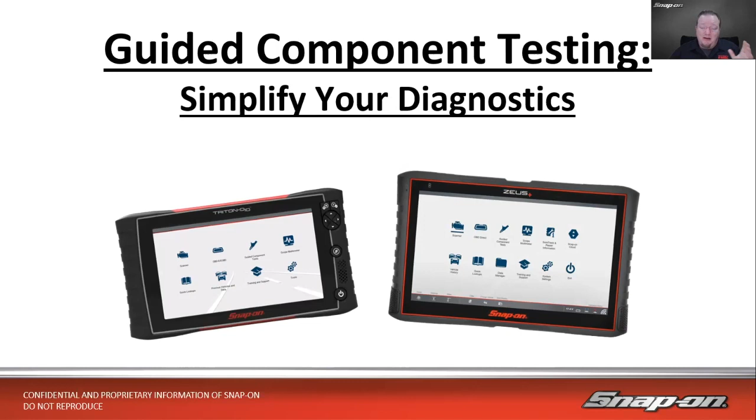So our topic today is guided component testing. Simplify your diagnostics. Now, if you've used guided component tests, you may be aware of what I'm talking about. But if you have not used guided component testing and you have a tool that's capable of it, you'll see, hopefully by the end of this, that this will save you a ton of time when it comes to testing stuff. Because really, we have two different types of diagnostic tools, right?

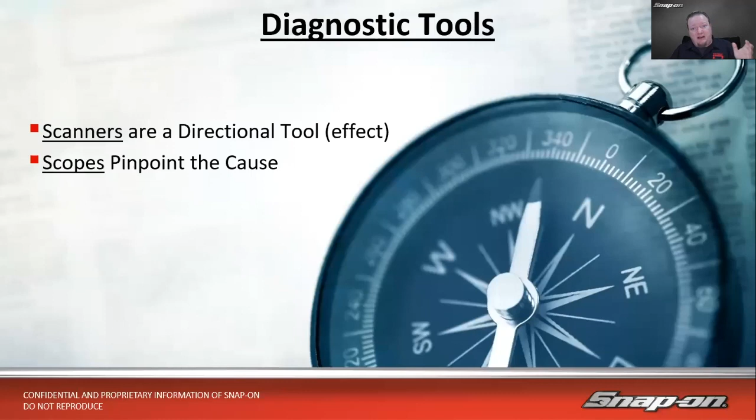We have scanners and we have scopes. And when I think of a scanner, I like to think of it as a really nice compass. It's going to point us in the right direction. It's going to show us where we need to look, where we need to go, but it's only showing us the effect after it already happened. In order to find the cause of the problem, because every effect needs a cause and every cause has an effect, so that's where the scope comes in. I'm going to actually test the component or test the wiring, test something in order to tell where the actual problem lies and not just look at the symptom.

So if we think about a vehicle's computer, let's think of it like a house. It's got a front door and it's got a back door. Now, coming in that front door is going to be all my raw data inputs. So my coolant temp sensor, oxygen sensor, NOx sensor, all of those things are going to come in. The computer is then going to process that information, however it's programmed to do that. And that's the key point right there. It's only as good as its programming. And that's why we have these things called reflashes, right?

So it processes that information and then it spits that processed data out the back door to the scan tool. So if I'm only looking at that data using a scan tool, I'm only looking at it after the computer's got its hands all over it, and it might not always necessarily be accurate. A good friend of mine used to say, scan tools don't lie, they get lied to, right? There's many different reasons we can have erroneous data in there. And top of mind comes with coding, right? That's why reflashing, or the code that's inside the computer, that's why we have reflashes. But...

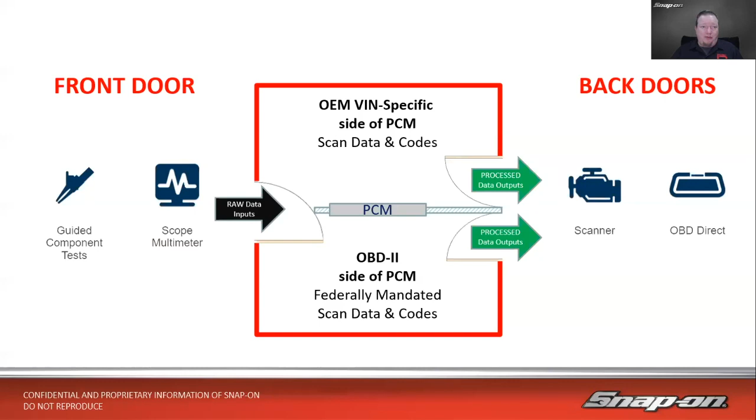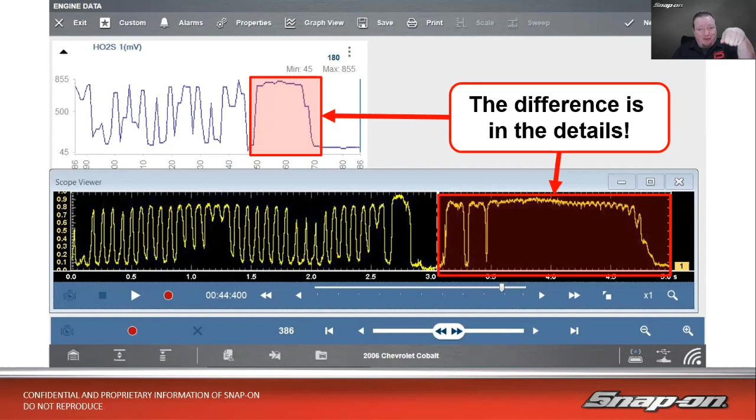So you can see a lot more fine detail in those signals between that one and that one. It's like watching a 4K ultra high HD TV versus one of those little maybe black and white things you had in the garage growing up, right?

So an open in the line, we could go two ways. We could go no voltage to the component. If I'm trying to supply 5 volts and it's not making it there, then that's an open, perhaps. That's making no voltage go to the component. Or other side of that, maybe we have voltage going to the component, but no voltage coming back on the signal wire. So that could be an open situation coming back. Maybe the wire's cut, something.

Next one is short. So a short could be too much voltage or not enough voltage. Excess voltage is short to power. Maybe I got a 5 volt and a 12 volt rubbing next to each other inside the harness there, and then all of a sudden they kind of short together. Maybe I get 7 volts, 10 volts going down a 5 volt line.

That's not good. Or I have insufficient voltage, a short to ground. So if I'm rubbing on the back of a block or something like that, or a cylinder head, and it's pinching the harness, and the harness is shorting out to ground, maybe it's pulling 4.5 volts out of that line. I only got half a volt, or maybe it's internally short where it's shorting the ground.

And then we have resistance, right? So we have corrosion or damage. Corrosion, especially like up where I live, they put a bunch of crud on the road. And anything made of metal, copper included, is going to get that green fuzzy stuff all over it.

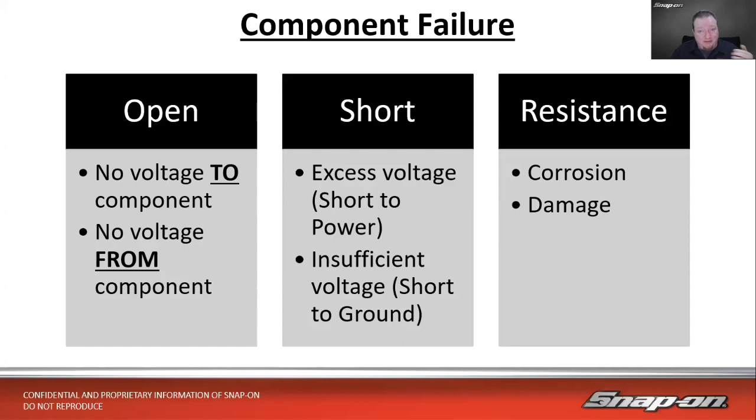Or damage. If I had a frayed wire, say it was a multi-strand wire, and I only have 1 or 2 strands left connecting, well, it's still going to flow. It's just not going to be able to flow enough current to maybe make it work. So damage can increase resistance going through it as well.

So if we think about it, what is a lab scope anyways? If I'm totally coming in off the street, not aware of what a scope is, how would I describe it? I like to think of it as a window. It's a little window I'm going to look through, and I'm going to see what this signal I'm measuring is doing - voltage, current, pressure, whatever I happen to be reading. It's a measurement on the vertical axis over a time period on the horizontal axis.

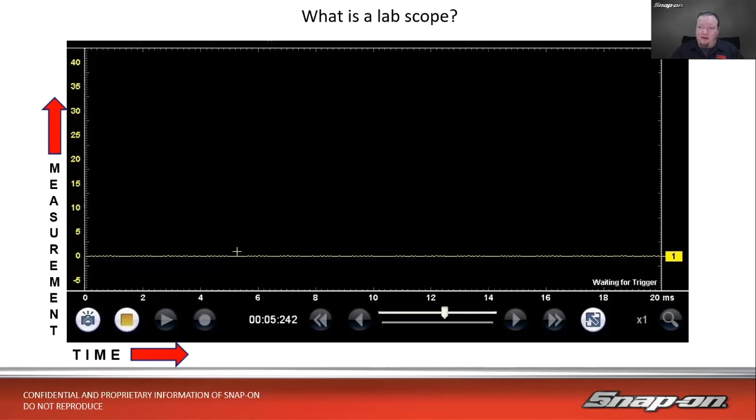So I need to know a few things. If I'm going to use a scope, I just need to know a few things. There's plenty of places you can learn it and look it up, but let's see what I need to know. First, I need to know where is this component I want to test? Where is it located on the vehicle?

Good to know. How about, how does the component work? Is it a solenoid? Is it a switch? Is it a thermistor? What kind of part is it, and how does it work? Because I need to know how it works in order to make sure it's working properly, right? Wiring pin out - where does power go? Where does ground go? Where's the signal wire on this particular component?

How am I testing it? Am I using a voltage test? Am I doing a current flow test? Am I doing a resistance test? Am I doing a pressure test? By the way, if I were to test a fuel injector, I could test it any of these 4 ways. And we're going to talk a little bit more about that when we go live on the tool here in a minute.

So that's just one component, and I can test it 4 different ways. And there's a multitude of components where you can test at least 3 of these 4. So just think about that, take that into consideration. How am I going to test it? What am I testing for? What range do I need? Remember that vertical axis on the scope - do I need 5 volts, 10 volts, 20 volts, 100 volts?

What's the best tool for my signal? Maybe a scope isn't the right tool. Maybe I need a DVOM. Maybe the DVOM isn't right. Maybe I need a graphing DVOM. Maybe I need a scope. Maybe I need an ignition scope because I'm testing ignition components or drivability issues.

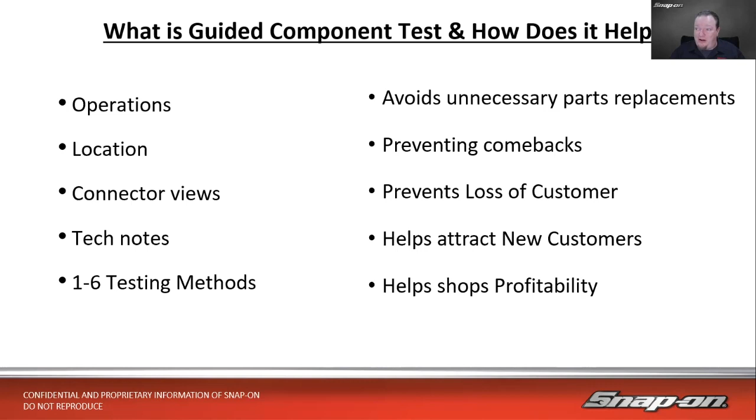Also, the other side of that coin, though, is it could help attract new customers to your shop. You're the shop that gets it right the first time and tests everything properly. Maybe you become that shop and you get that good reputation. And then overall, doesn't matter where you work in a shop. If you're the secretary, you're the owner, or you're the lead tech or the oil change tech, it helps shop profitability. Having a profitable shop is good for anybody involved.

Also inside the guided component test, let alone the 7 million tests that go back to 1981 - yes, by the way, there's over 7 million guided component tests inside the tool that go back to 1981 - there's built-in training. This is just a small sample of the types of classes that are in there: a 10-minute basic electronics class, advanced ignition system class, air conditioning. There's 65 different categories of class within the tool.

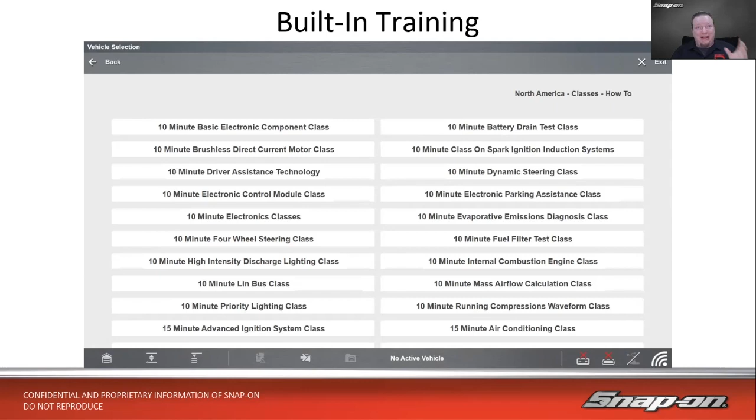And the beauty of it is I don't have to hook up to a car to see it. It's going to be right there, ready to go anytime I need it. So, training at hand. Here's just one example with radar cruise control, right?

So adaptive cruise control uses radar to monitor vehicles' position in traffic, et cetera, et cetera. It's going to walk you through how it works, kind of at a high level. It kind of depends on the component, but we can see how that works.

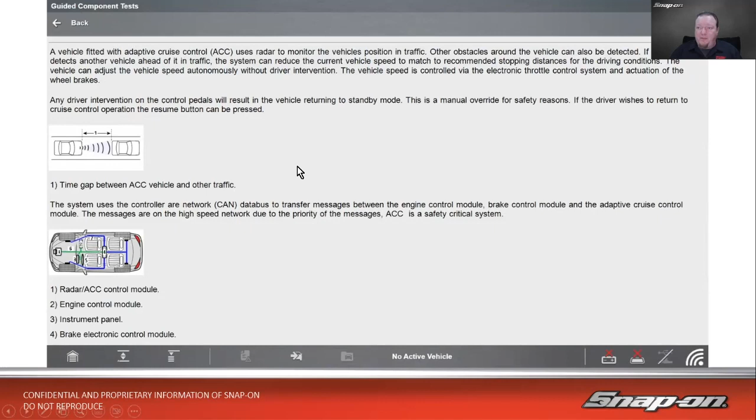Also inside, as I said, it's going to show you how to hook it up. So, how do I need to hook it up to the tool and how do I hook it up to the car? Where to hook it up? It's going to give me a connector view, and then it's going to give me my colors, right? If we have the wire colors, we'll have it, blue, yellow, etc. And then what it should look like. In this case, it's a signature test, so that's what it should look like. Otherwise, it could give us a voltage or a resistance value or something. It's going to give you what good is on the screen, right here on the screen, ready to go.

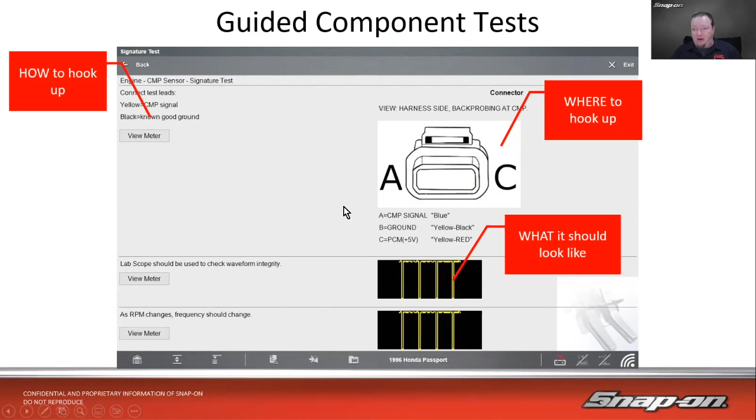Also newly added in the spring, and we're adding a ton more in the fall as well - in any of the tools that got a component test, you're going to see actual pictures for locations. Now, instead of it telling you in a paragraph, it's going to show you. So here's an overall view of roughly where it is, and then it gives you a direct arrow to show you exactly where it is.

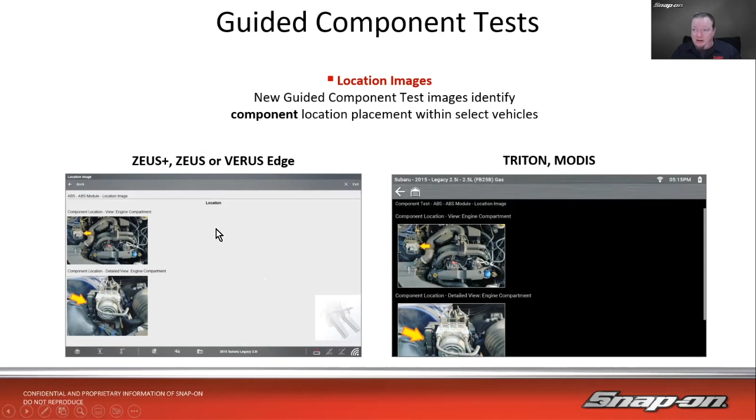It's going to be on Windows-based tools and non-Windows-based tools, as long as it's got a component test. So there's a blown up version of that. You can see, all right, so it's over here. There's the hydraulic unit, and then there's the ABS control module that we're looking for right there in this particular case.

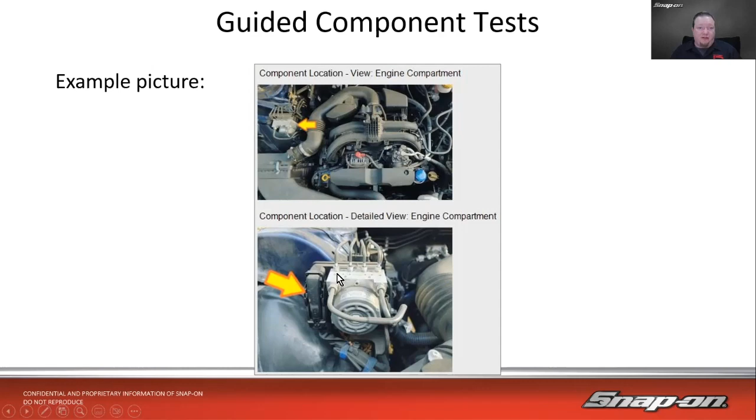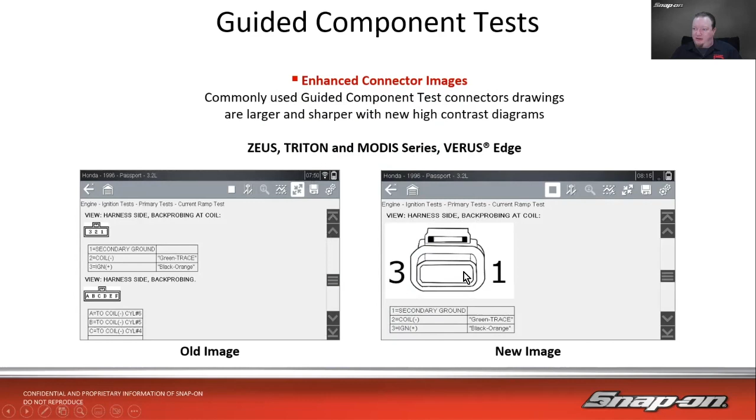Also in guided component test, they've improved the way the connectors look. You'll see this as a running change as we do updates, the more connectors they get through. Screen resolutions got bigger, but the connectors didn't necessarily scale up. So going from small connectors that are hard to see, going up to a much larger, easier to see connector. The connector itself didn't change, just the artwork changed with it. So it's got pin 1 here, pin 3 there, and you can imagine 2 would be in the middle.

All right, let's go live on the tool and talk about what if I didn't use guided component test, because you may have it and still never use it.

First thing I need to do is look up all this information, so I'll go into my repair information. Here I've got a 2012 BMW, and let's say on this 2012 BMW I suspect the injector is bad, maybe it's a drivability problem somewhere. So I'm going to load in here, and we've got to reload since we're loading from scratch.

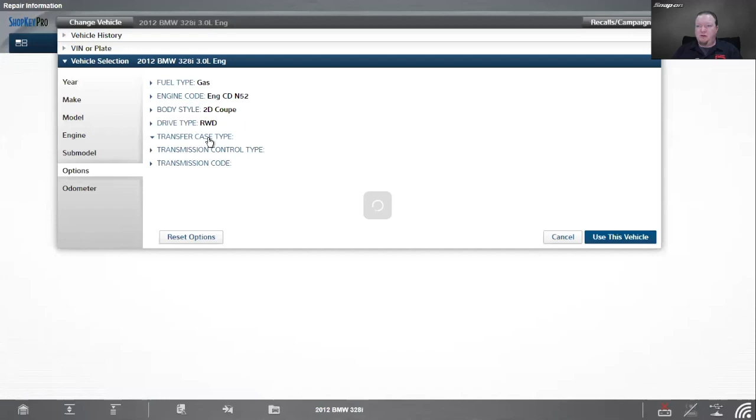N52 engine. All right, so this is ShopKey, and I'm going to look up injector.

Now remember, this is information from BMW, so it may be a little different. TSBs for a fuel injector - this one doesn't necessarily apply, and then we have a fuel composition tester, so there's really not a lot there.

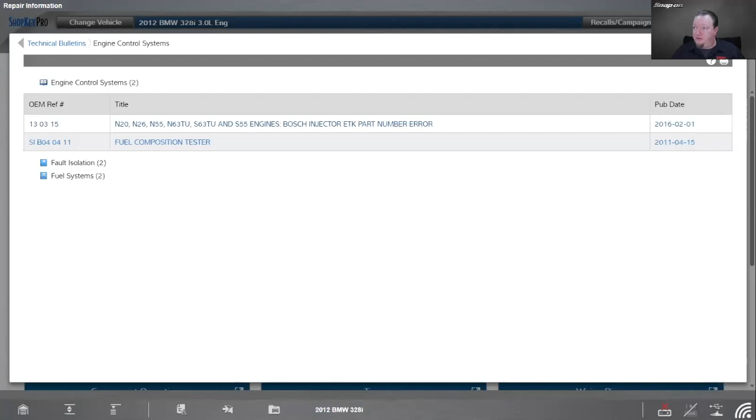How about specifications? What have I got? Let's see, it looks like I got torque specs, so I know how far to tighten it down and what thread it is. Looks like that's about it - we don't have any resistance values or anything.

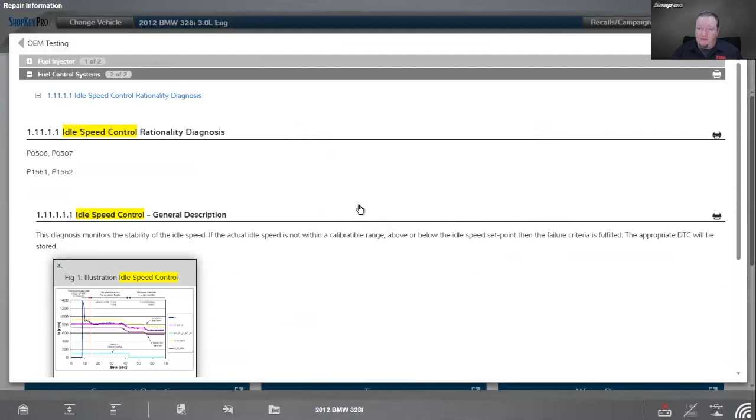How about OEM test procedure? Way to test it? No, idle speed control rationality diagnosis. So it's going to give you some parameters that it monitors in order to know whether or not it's running properly.

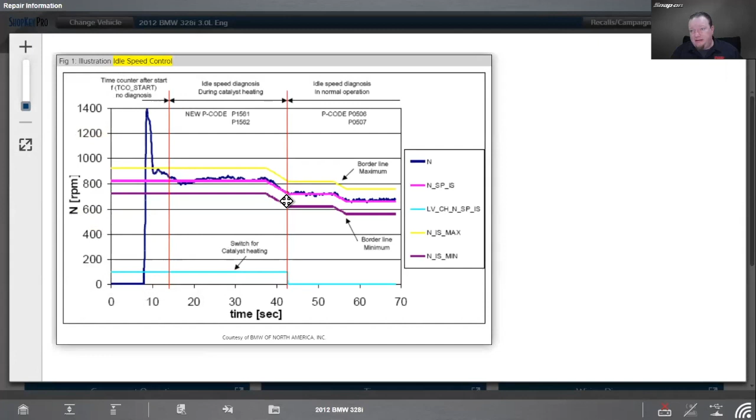All right, we're going to skip guided component testing because, as I said, we're not using it right now, and then we'll see the difference. So that's that, and that's that - those three things right there.

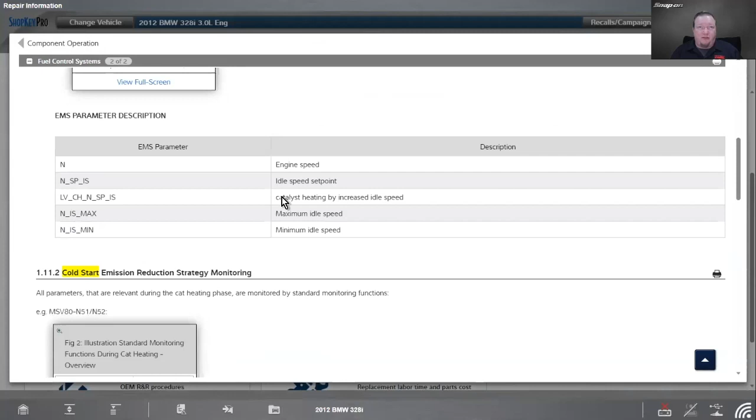Component operation - how does this fuel injector operate? It's going to walk me through some more of that speed control stuff, emissions reduction strategy monitoring, different things like ignition timing, and so on. Still not a ton of information on that.

How about wiring diagrams? That should be good. Yep, so on page 3, because that's where the injectors are. And we'll see, we need to highlight all the injectors because it only does one at a time first.

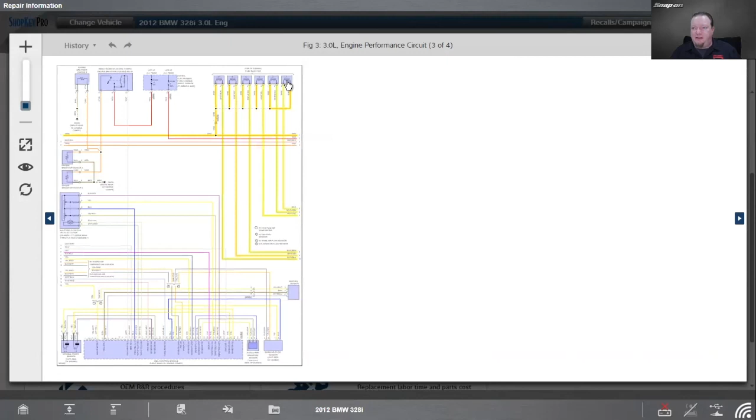Dim that out so we can see they all share a common power. This orange wire is power on all of them. Then they have individual control wires: white/green, white/yellow, white/brown, white/violet, and white. So where do those go?

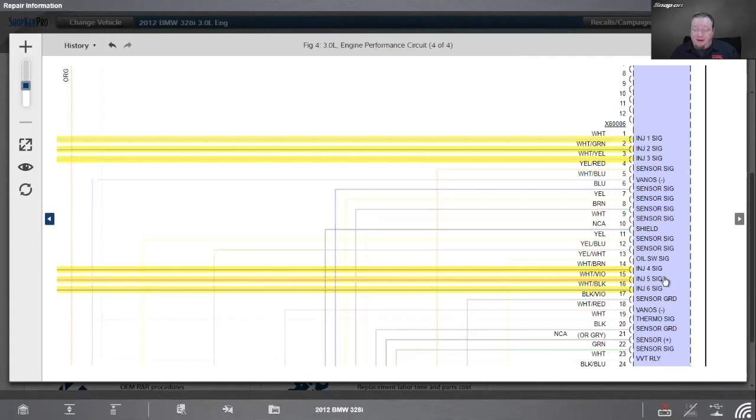I go over here, and we can go down a little bit. We can see it goes right to the PCM. So I've got my injector signals right there. It's going to tell me if I need to test it at the PCM or not. All right, good, so at least I know the wiring diagram.

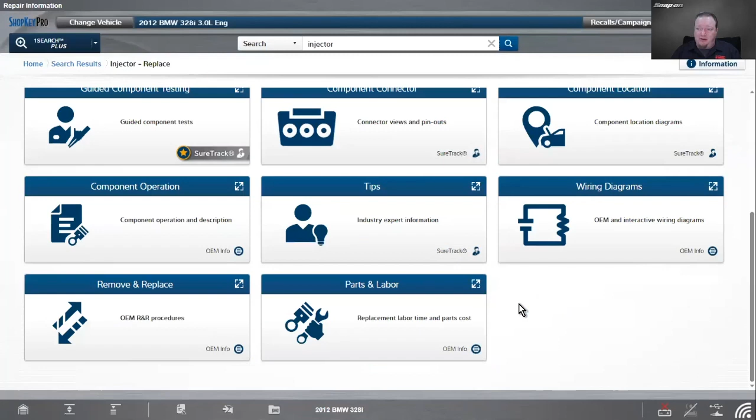At least I know what color wire I need to test if I'm going to test voltage or resistance - just ohm it out across the two. Okay, so that's about as much information as I can get out of BMW in this case. Oh yeah, remove and replace is going to tell me how to at least take it apart. Looks like it's fairly easy at the top, kind of not easy to get to the connector to test it, but at least I can get it out.

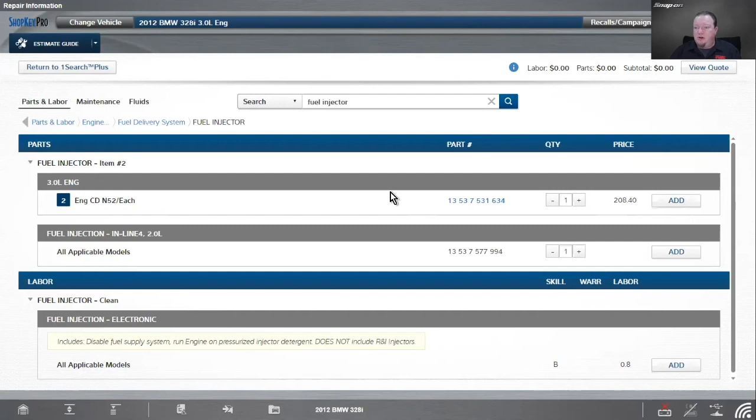So I go into parts, looks like $208 for the fuel injector right there, item number 2 - so that would be item number 2 right here. So now I kind of know where it is, it's on the top of the motor somewhere. I know roughly what wires I need to check, and let's go check it then, I guess.

So then I need to know, well, what do I need to test? I want to use my scope, but the first thing I want to do is ohm this thing out, and I can't - well, I'm in the lab scope and it doesn't let me do ohms.

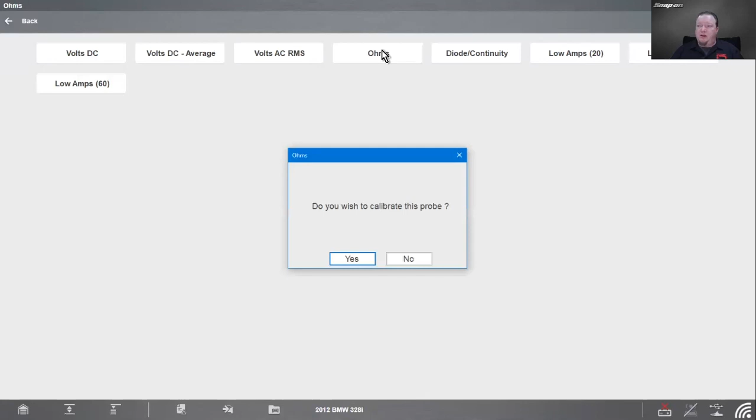Maybe my digital multimeter, my friendly digital multimeter. Maybe that'll work. Oh, yeah, there we go. There's ohm. All right, cool. That says, though, I want to calibrate the probe. So, yeah, we'll calibrate the probe. And all we got to do is it's going to tell me connect channel 3 and 4 together. So that's the red and the blue. We're going to plug them in, hit OK. And it's going to calibrate. And then it's going to open.

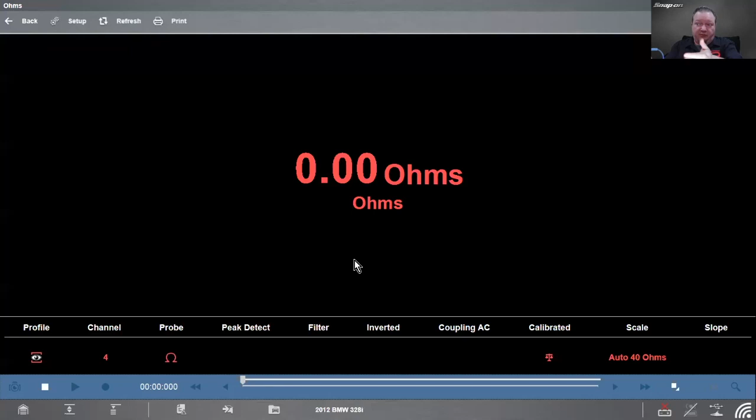All right, now it should be 0 ohms because they're connected directly to each other. There shouldn't be any resistance. But let's hook it up to my fuel injector. All right, so plug in one end there. And we'll plug in one end there and see what happens. All right, nothing. Oh, cycling down. All right, there we go. 11.24 ohms. Is that good?

Oh, could be. Maybe it is. Maybe it isn't. I don't know. Wasn't able to find a spec. Now I could test it across other injectors, I suppose, and see what happens there. I don't know. What happens if I check voltage? Let's check voltage. So my multimeter, and we'll check voltage, and I'm seeing 15.24 volts.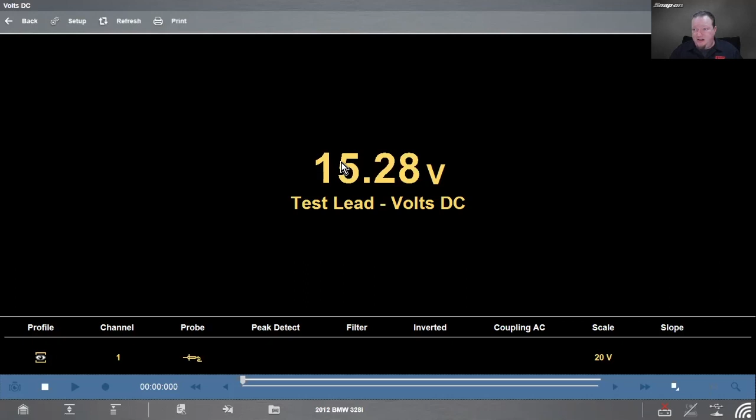Is that good? Is that supply voltage? What's going on with it? That seems a little high if we're running an alternator, right? A little high for an alternator. I don't know what good is. I guess, if I'm checking power, maybe it'll be okay. Maybe I can try my graphing meter instead. We'll do that.

Well, that doesn't look the same. It's kind of going off the screen too. It looks kind of weird. Just going up and down a lot. And that's way more than 15 volts too. So that's interesting. How about I use my scope? Go to my scope and do volts. Oh, there we go. That's what it looks like.

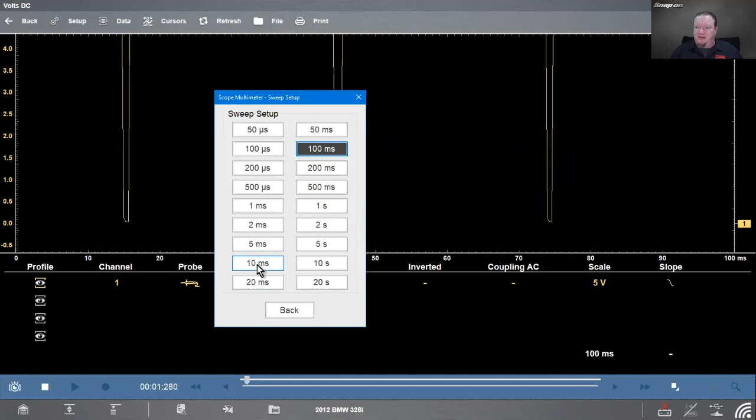Now, maybe in this case, I was set up like maybe that. Right? I have no idea. I can't really see what's going on. So then I got to mess around with the settings and see if I can make it work. Well, let's see. That's 2 seconds. Seems like it's too long. 100 milliseconds. I'm trying to get just one. Oh, there we go. It's just one on the screen there.

And then for my scale, is it 5 volts? Well, definitely not. It's going off the screen there. So maybe let's try 20. Still can't really see it. Let's go up to 50. Hey, that's pretty close. I still can't see the top though. I don't know how far this goes. So let's go to 100. All right, there we go. Now I have a fuel injector pattern on the screen.

Now I know from doing this time and again that that's what it's kind of supposed to look like, right? Whether or not the voltage values are right, we can get a little further into that. But in this case, see how long that took me and see how little information I actually had to go on. And I could imagine if you're not using guided component tests, that's how you're going to have to approach it, right?

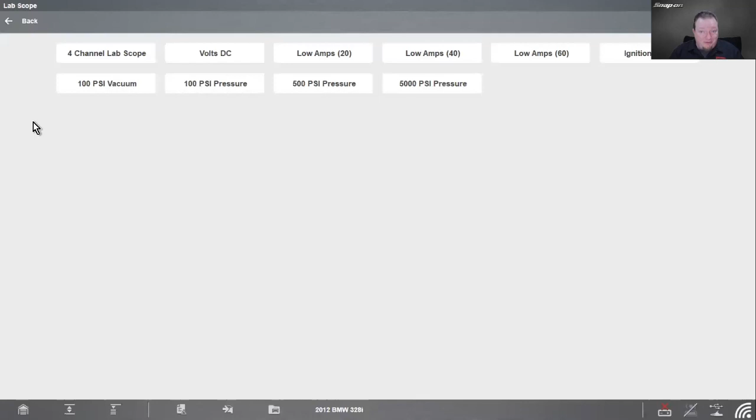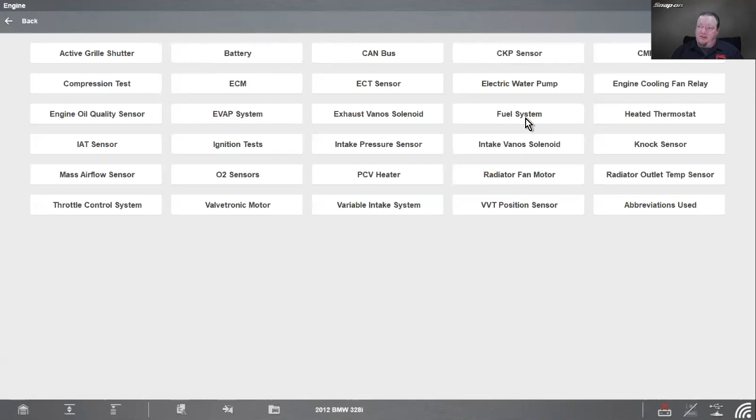So now let's do it the easy way. I showed you the hard way first. Let's go to the guided component test. Once I load a car, it's going to list the different systems I can test stuff in. So if I want to test the injector, that's in the engine. And then we'll see components or maybe even subsystems in there. So in this case, fuel system is where the injector lives. And then we'll go to the injector.

All right, first thing I want to know is tell me more about this injector. Component information. So it is a conventional fuel injector. These are normally closed solenoids responsible for delivering atomized fuel into the intake manifold. When energized, the coil winding inside the fuel injector will create an electromagnetic field. This will pull the pintle off the seat and allow the injector to spray fuel. Injector on time is known as pulse width and controlled by the ECM based on engine speed, load, and temperature.

It says ignition positive is supplied to the injectors by the fuel injector relay, so we need to know where that is. And the ECM switches the injector ground side. So that's why it shows us the ECM over here. Best test location is at the ECM, right rear of engine compartment under the white E-box cover. So it tells us where that is. And the fuel injectors themselves are mounted to the cylinder head just in front of the intake manifold in the fuel rail. We saw that picture when we looked in the service information.

All right, good to know. Supply voltage to the injectors through this fuse to the main relay and then to the injectors. So I know the path through there. All right, so everything else here is going to be a test. And we can test it 4 different ways.

We can do pulse width, resistance, signature, and current. So I'm going to go to resistance first because that's what I did first there. And it's going to tell me where to connect my leads. Good to know. Red to injector control signal and blue to fuse 5 with the fuse removed. Should be 10 to 14 ohms. At about 68 degrees, resistance should be about 12 ohms. It's a little warmer than 68 degrees in here.

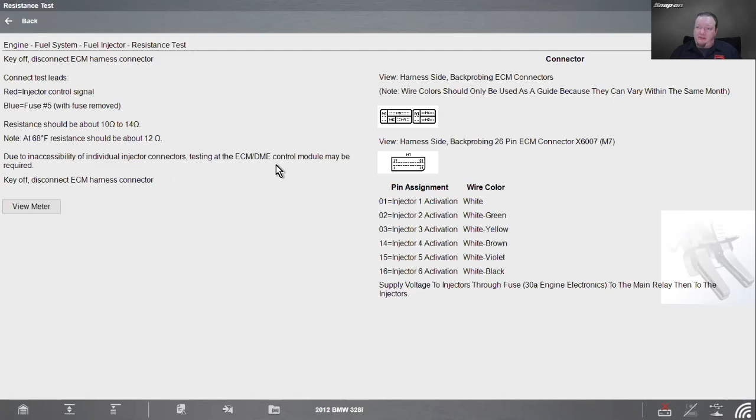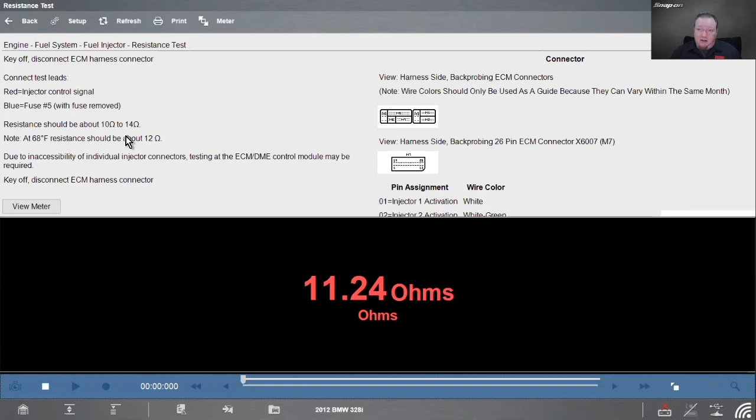So due to an inaccessibility of individual injector connectors, test at the DME may be required. Key off, disconnect. Okay, hit view meter. I already calibrated it, so I don't need to do that. And boom, right there, right up to the 11.24 ohms that we knew. Should be 10 to 14 at about 68 degrees. It should be about 12, so that's pretty darn close. Looks like we're good there. All right. And it set it up for me. And it pulled up that it was a DVOM that I needed.

Next one we'll do is a pulse width test. So I can go in here. It's going to tell me it should be about 2.5 to 3.5 milliseconds. I'll hit view meter. And then we'll see. We'll change the pulse width a little bit. Goes up, comes down, goes up, comes down. So if I were to rev the engine, we'd be able to see it go up and down. Now this is a graphing meter. So for the resistance test, it picked the DVOM. For this test, it takes a graphing meter. So already we didn't have to go back and forth and figure out what meter is appropriate.

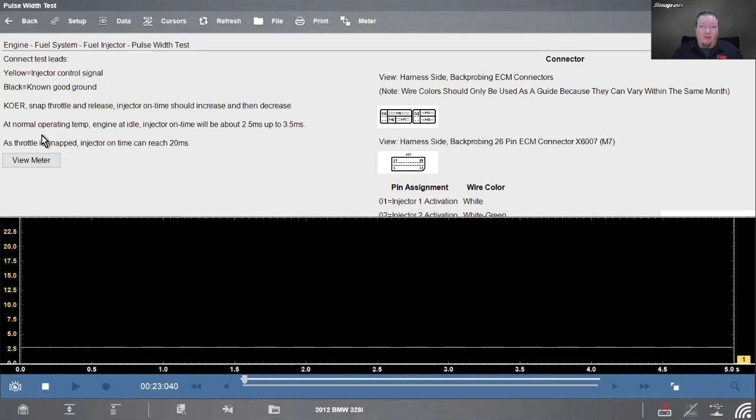It's just there. And then when I go into signature test, it's going to tell me once again where to plug in, give me the connector view. May need to raise the voltage levels. That's good to know if the signal is clipped, and it gives me a known good pattern. I hit view meter. There's my pattern. Scroll up. There's my known good pattern. Looks pretty close. Now I can bring this down a little bit with my simulator. Probably something like that. And then I can move this over, move it around. I can still do that.

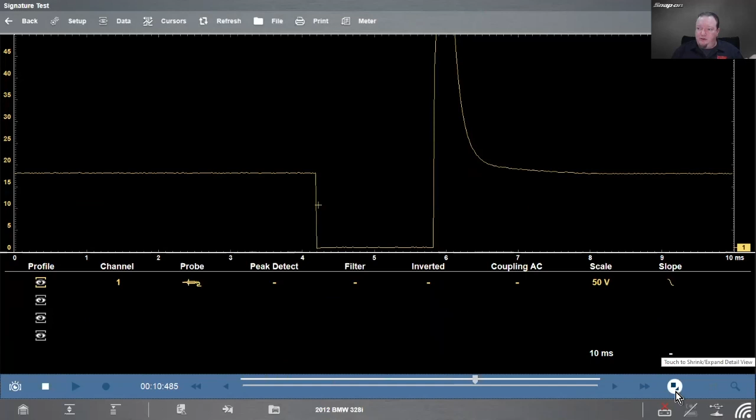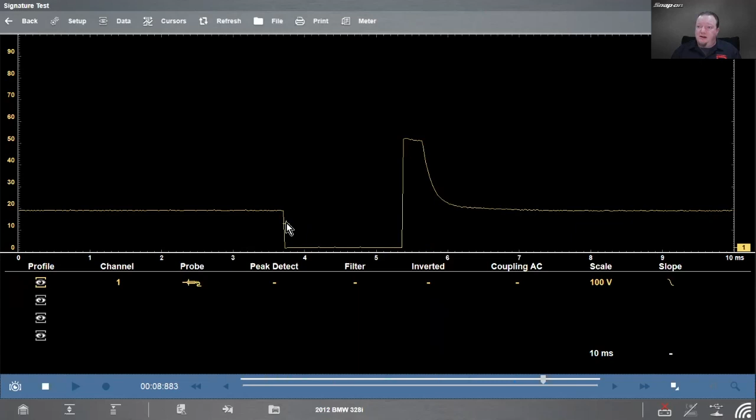Now, also note that it automatically set the voltage and it automatically set the time to where it needed to be. I didn't have to muss around with trying to figure out what those settings have to be. Now, it is a little off the screen, and it does say may need to raise the voltage. So if I just go down here, I can still do everything that I can do in the scope, I can do here. So let's change the scale up to 100. There we go. Now I can see the top and I know where that is. Now I can go in and measure it later using the cursors and so on. But having the tool be able to do all this for me and having everything on the screen.

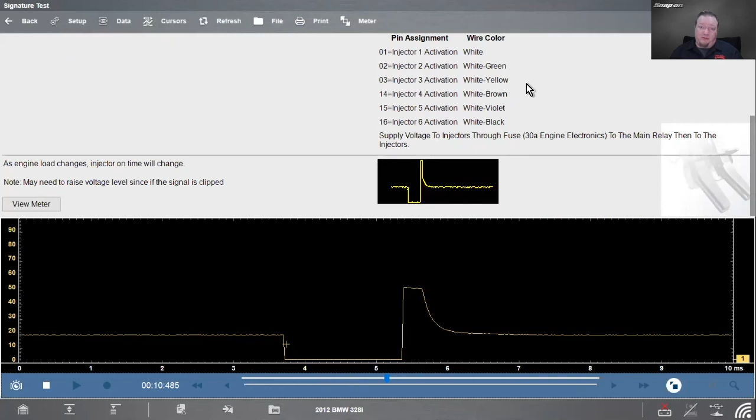Once again, there's my known good. There's the pattern I get. That's pretty darn close considering it's a simulator. It's about as close as we're going to get. And on a normal car, that would be a normal signal for a fuel injector. So a wealth of information in here. I didn't have to go elsewhere to look it up. It's already installed in the tool. As long as you have a tool with guided component test in it, it will have this information in it. Depending on where your software level is, you may have more, you may have less. If you got current software, you got the most you can have.

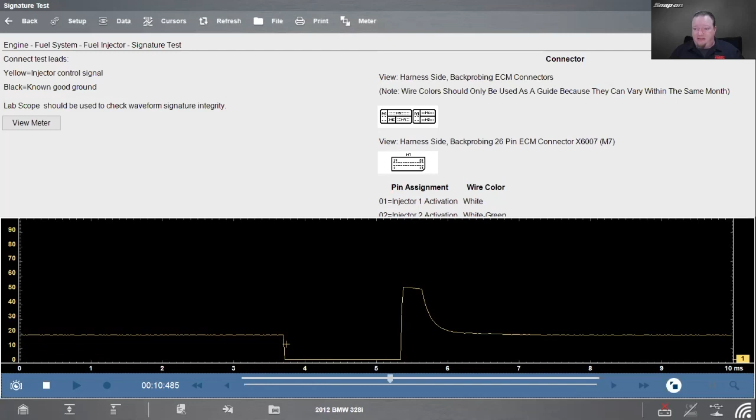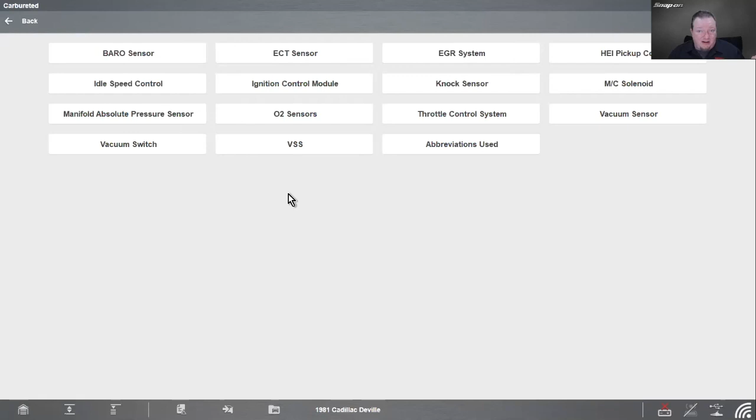Now, another thing I'd like to talk about. So that's the base information in there using that 2012. I'm going to back out of the car and then just go back in, and we can see the selection of vehicles. There's 42 different vehicles in here other than demonstration that we can go in and we can test stuff on. So let's say Cadillac, 1981, DeVille with a 4.1. Not a lot of stuff going on the vehicle to begin with, but if I go into the carburetor system, we can see 14 components, HEI pickup coil, knock sensor, BARO sensor, ECT, all this stuff's in there, readily available if I wanted to do something like this.

Also, I'd like to mention at the very top, this has kind of moved around throughout the years, but now we've finally settled on it being right at the top, and we call it class. So these are those classes I was telling you about earlier in the PowerPoint. So we got power user tests with different current probe tests, dual channel tests, secondary ignition tests, and pressure transducer tests. So that'll be not VIN specific. It's going to be more of a generalized test, but yes, available in there.

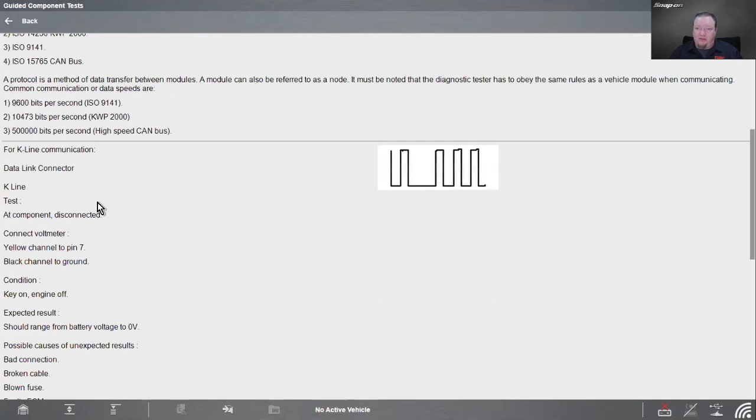And we also have how-to. So how-to is where all the meat and potatoes is inside this. This is where all the classes are. So 65 different categories of class. If I scroll down, you can see things like data link connector. What pin is what on the data link connector? What should I see for a waveform on a K-line? What should I see for a waveform on a CAN bus? You can see all that information right there.

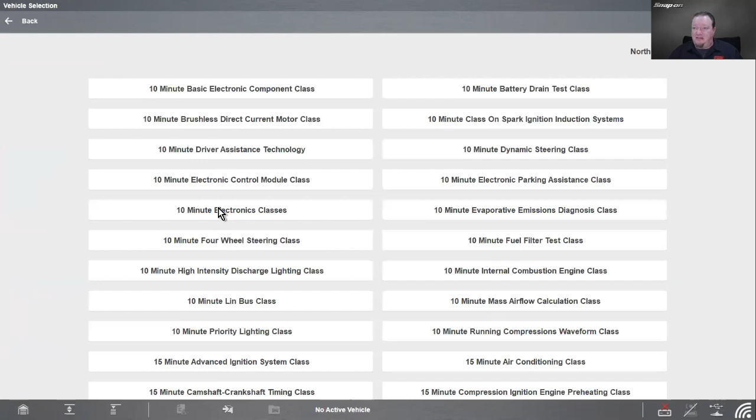And then if you actually hit view meter, it's going to test it. It's going to set it up for you as well. Let's see, 10-minute electronics classes: current, diode continuity, scientific notation, voltage, Ohm's law. Maybe I forgot my Ohm's law today and I need a quick refresher course. It's going to be right in there. All sorts of information, 65 different categories.

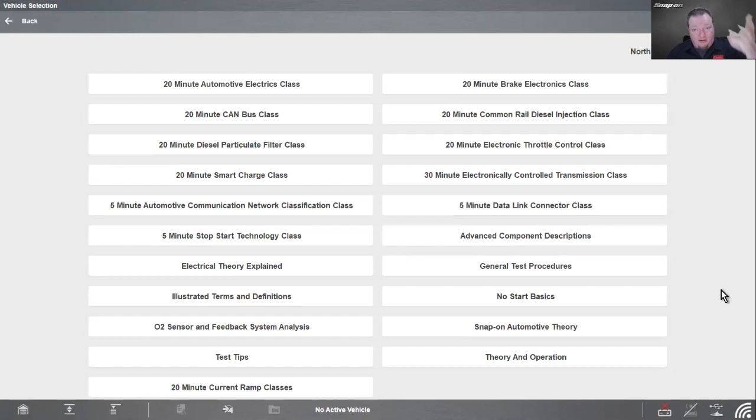And the other beautiful thing about it is I don't have to be hooked up to a car to use this. It's already there. I can just go in with classes. I can go into any car that's in here, I can go in and I can load up. I don't know, let's see. Let's go to like a GMC 19 Acadia. All right, with a 3.6. What do we have? ABS, charging system, engine, and transmission.

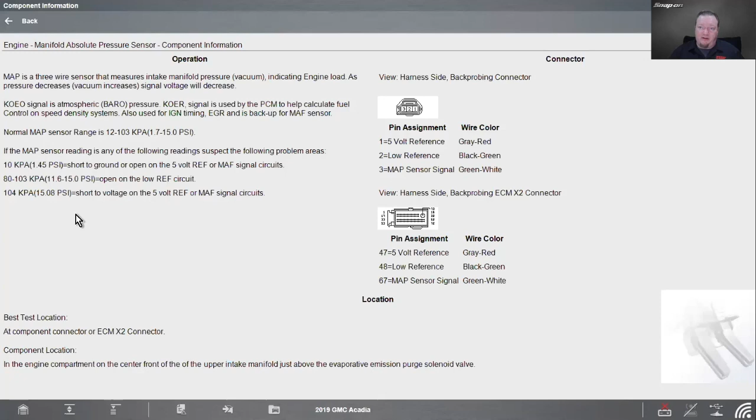So I can go in if I wanted to find out more about the MAP sensor. There it is. There's the signal wire. There's the pinouts on the computer, and then it's going to give me my known goods. Any vehicle you can just go in and look up. You don't have to be connected to a vehicle in order to utilize this information, which is helpful in many ways. I don't have to look up where to hook it up. I don't have to look up the wiring diagram. I don't have to look up how it works. I don't have to even know what good is because the tool will tell me what good is.

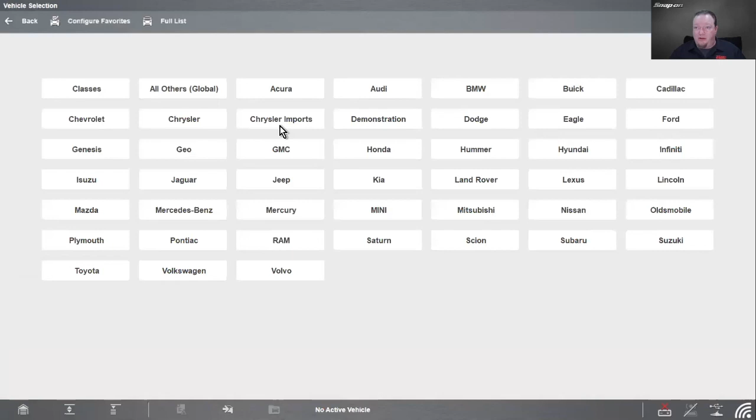This is a database culled over the last, what does it start? '96 with the Vantage, the original Vantage, the one that matched the red brick. The database has started since then, moving all the way up till about 2021, 2022. Depends on the year. Depends on how many people we have to build them, because like I said, these tests are built. So Chevy's up to 21, BMW's up to 20, Audi's up to 20, Kia's up to 21, right? So it just depends on the manufacturer. You're within a couple of years.

Because the thing is, like I said, real live people hook up to these cars and do this. It's their job. They go in, they plug in, they take pictures, they get all the connector views, they know what the goods are, and they write articles on them. These are real live cars, so they have to actually be able to get to test the car. So that's why sometimes you're at least a couple years back, because A, it takes a little while to write them, and B, it takes a little while to find them. So definitely an untapped resource for a large number of people I know. If you do have a tool with the scope and the guided component test, hop in there and just check out what all you have in there.

It's not just North America either. If you're in the UK, you got UK cars. You're in Brazil, I think they got it down in Brazil too. Australia, they got it. So for each individual market, whatever car you cover, we have guided component tests to cover a good amount of cars, no matter where you're at. So definitely a good way to simplify your diagnostics day.